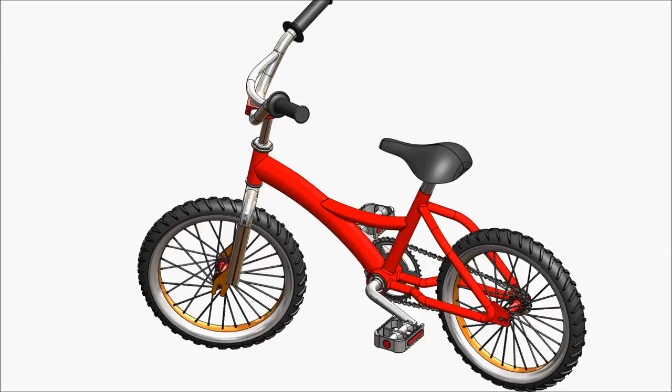Today we are going to design a simple bicycle, a kid bicycle, in Solidworks. I hope you like it. Let's see how to do this bicycle, and we will make a little animation at the end. So let's start.

Now let's make our first part of the bicycle, the steering. We make a steering handle. So let's start: top plane, sketch, and choose here. Let us first define a center line.

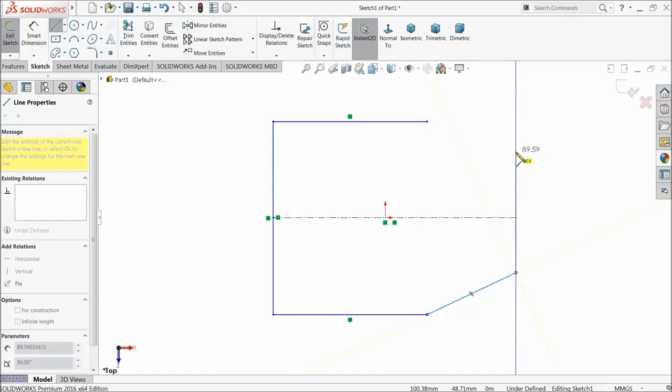Now choose and play a line, connect it, exit. Now let's create some relations. Select both ends of the line and this mid line, symmetric relation. The same, what we need to do here: symmetric relation. Let's select these 2 points and the center line, symmetric relation.

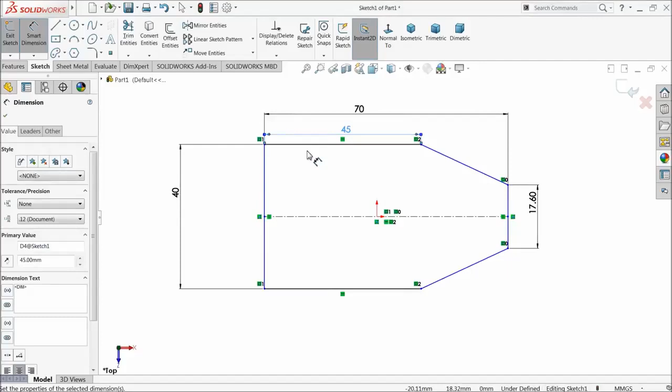That's it. Now let's define it: 70 millimeter, 40 millimeter, 17.6 millimeter, 45 millimeter, and let's make the distance from the origin point 35 millimeter.

Choose here fillet, 6 millimeter, and select these two ends. Now again change it to 26 millimeter. Select these two corners.

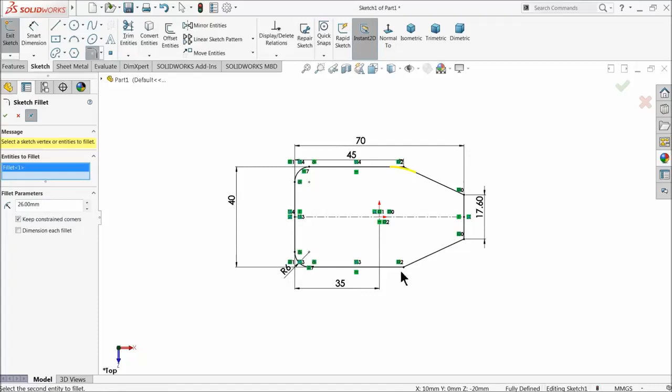I think we just undo one process. Keep only 26 millimeter.

Now the last one is 8 millimeter. Now select extruded boss, 20 millimeter, and let's keep mid plane condition.

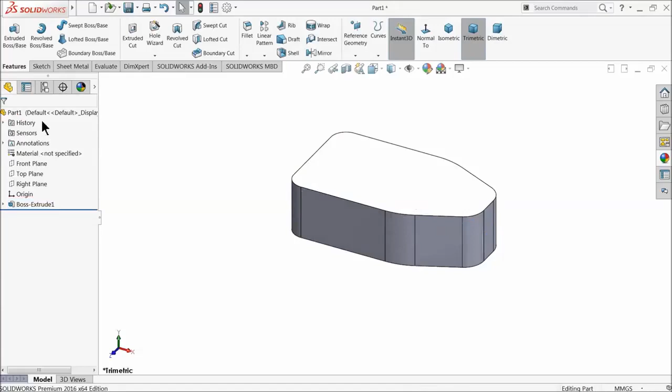Let's define some color to this body. Select only the extruded boss and let's choose some orange color.

Now select this body, sketch, select line, convert it into arc. Actually we want to make a half circle here. It's not going to exit. We don't want to make half actually.

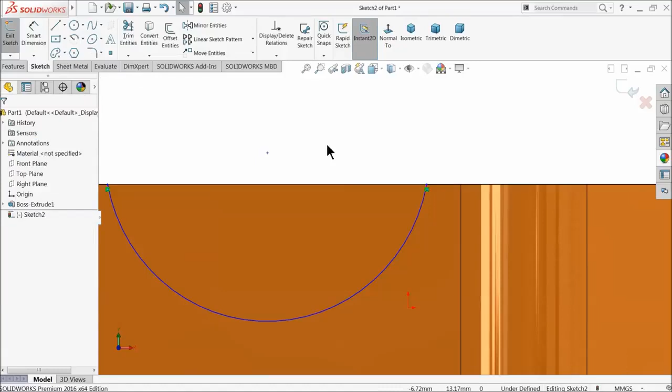Center point arc. Now start from here, connect this point to, okay, exit. Now here select these 2 points, go inside. That's it. Now let's define this point.

4.75 millimeter, and keep radius 12.5 millimeter. 11.1 millimeter. Okay, now here choose offset.

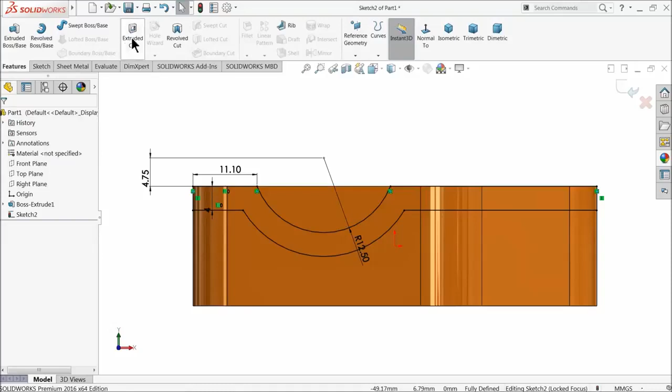Keep 4 millimeter and select this line. Choose here line and connect it. Exit. Now this portion we want to keep, the other all we need to extrude cut, select extrude cut. Here select flip side to cut, that means both sides will cut through all. Okay, that's it.

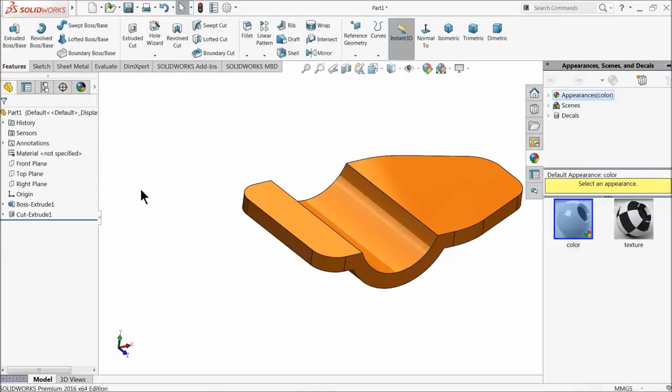Now let's start to make the handle rod. Select backside, sketch normal. Draw a circle and let's keep the diameter 20 millimeter, and the distance from the outer edge 19.18 millimeter. Select the circle center and origin, horizontal.

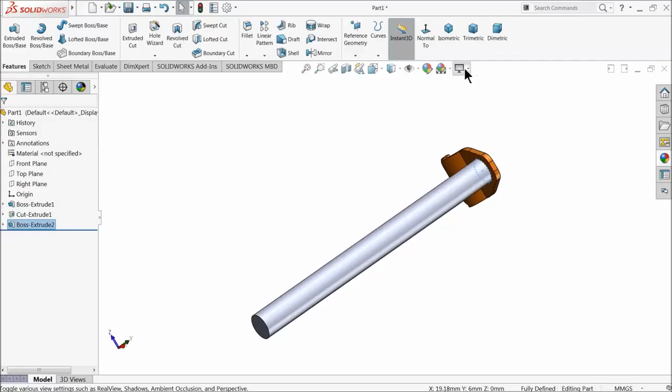Now let's extrude it, and extrude up to 225 millimeter. This rod we will assign later.

Now choose here the right plane and create one plane, 20 millimeter, just center to this circle.

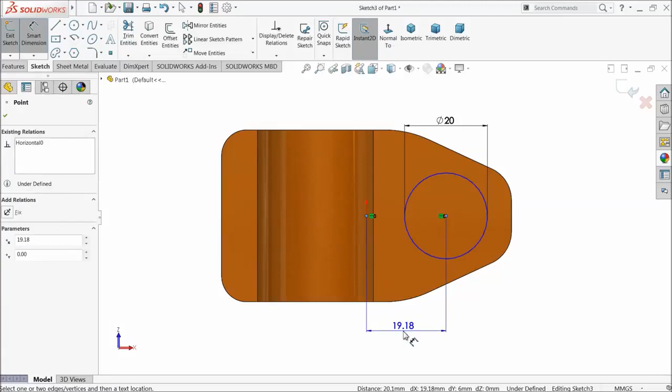Now edit this rod, sketch normal, delete this relation, and make it 20 millimeter, exit. That's it.

Now the plane in the main mid portion. Let's do one thing: select this plane, sketch normal. Now here we will extend this handle furthermore. Choose line.

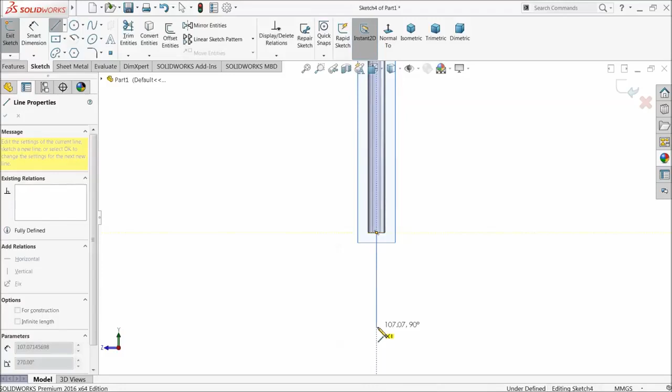Let's draw one center line, make sure it's a center line. Delete this coincident relation, make it a little up. Choose here line, convert it into arc, and take it down, exit.

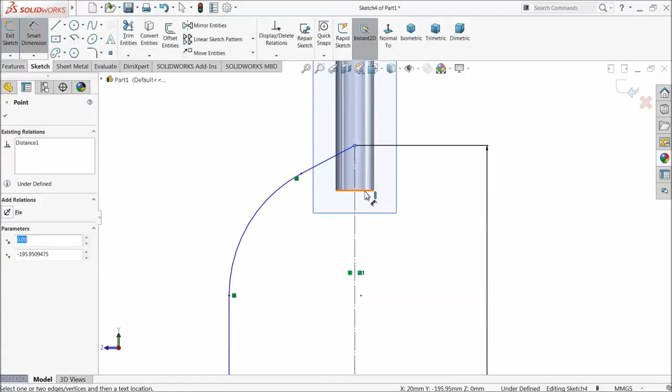Now let's define this: 230 millimeter, 30 millimeter, 68 millimeter the radius, and let's make the gap 57.5 millimeter. Exit.

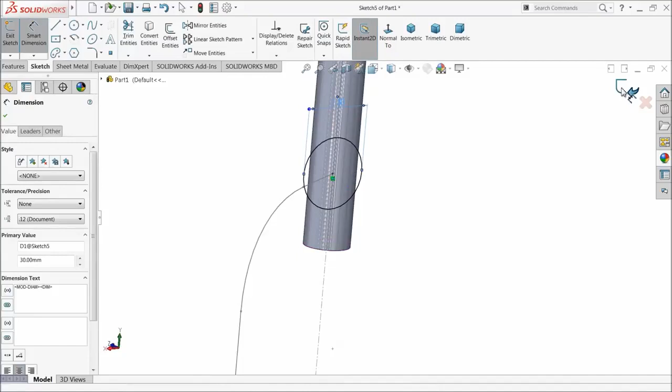Now hide this plane. Now here choose front plane, sketch circle, and let's draw a circle with this point. Keep diameter 30 millimeter. Exit. Now go to feature and select Sweep Boss Base.

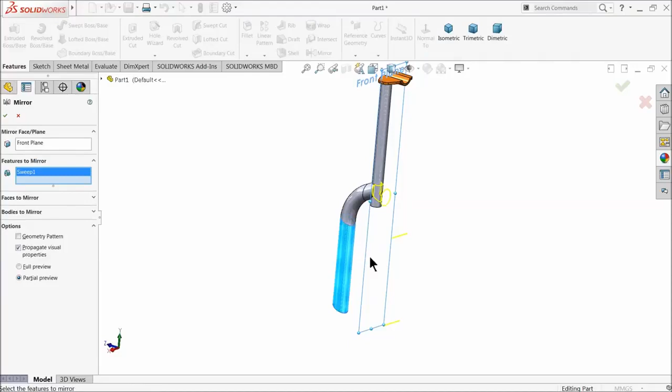Select this profile. Now you can see it here. Now let's choose front plane, mirror, and select this body, this extruded body, and just mirror it. That's it.

Now select this face, sketch circle, center point, and draw a circle with 30 millimeter diameter, and extrude it 150 millimeter but reverse direction. Okay, that's it.

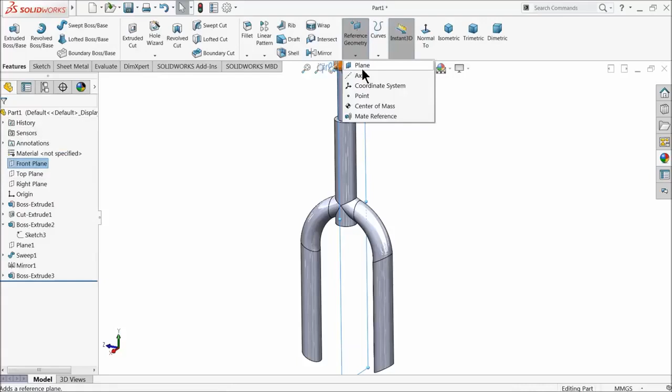Let's try to create one plane, front plane, and make it 50 millimeter.

Now select this front plane to sketch, take the position, and here we will make our geometry. So first make a center line, vertical, and just drag it, start point and put in center point. Select start point and this line, make sure coincident. Okay, now let's select here line and start our geometry.

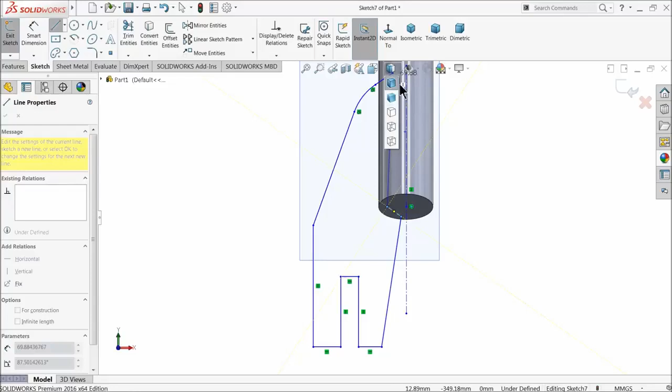Select up to here and this line and connect with this, exit. Okay, up to here.

Hide this plane. Now let's try vertical line, 11 mm, exit start point and put this star here at the center.

Or do one thing, delete this line. We need to again put one star here. That's it. Line.

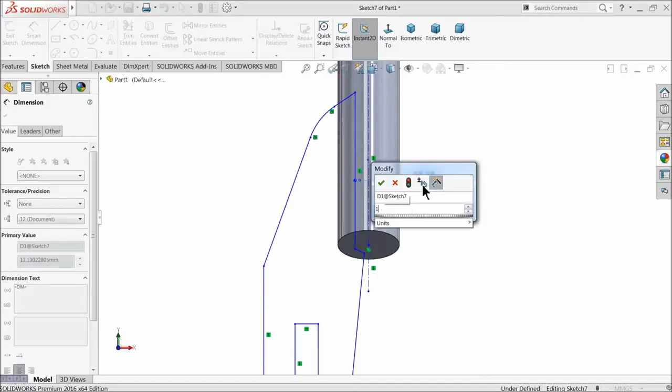Now let's define this gap, 11 mm. We are missing with these lines, so just delete this again and draw a center line from top. Here we will get the midpoint. Okay.

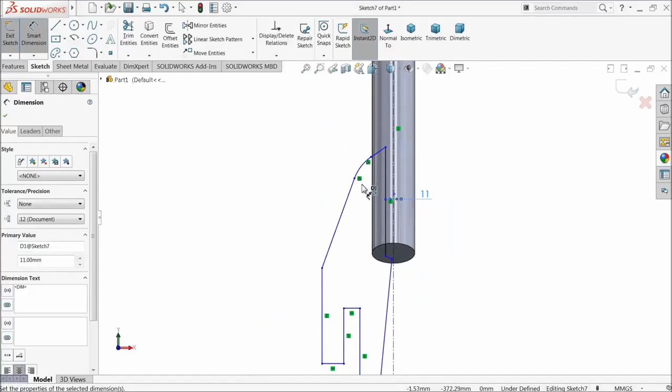Exit. That's it. Now let's move, 11 mm. Okay, make collinear relation.

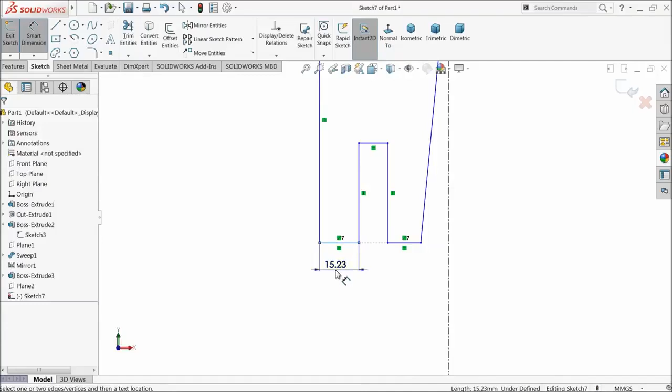Ten by 10 mm, and here also keep 10 mm. Select circle, trim entity, trim to closest. Okay.

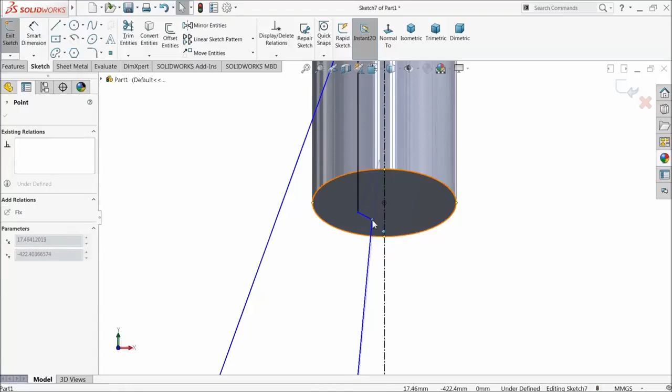38 mm, 25 mm. Okay, let's define some angle. 115 degree, 3 millimeter. Okay.

Start point put in center. Now define this distance from start point to bottom line, 38.75. Oh, it's missing actually.

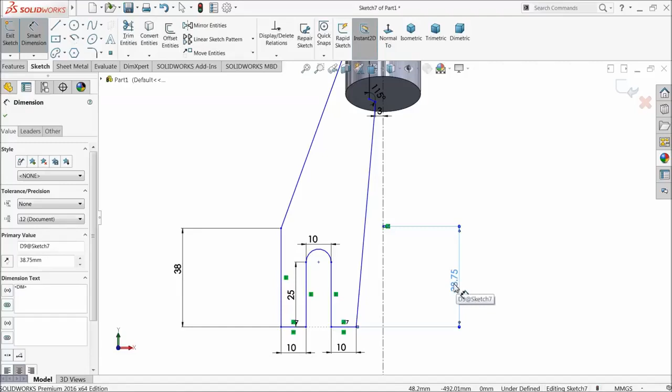Let's try to create one. That's it. Midline. That's it. Now fix distance from here to bottom line, 38.75 millimeter. That's it.

Radius keep 10 millimeter. Now overall distance check, 90 millimeter only. Fillet, 30 millimeter.

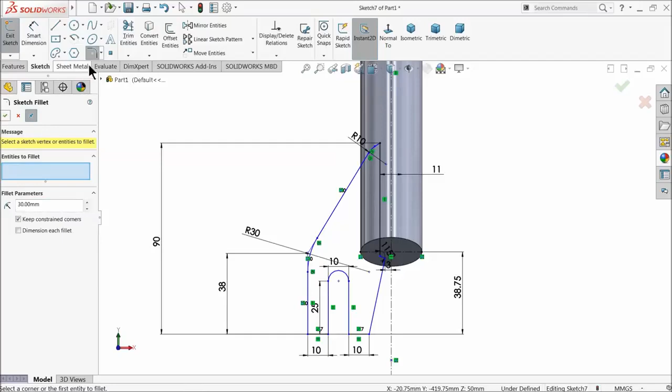Now let's choose 4 millimeter and select these corners. Okay. Now select here fully defined sketch, calculate. It's showing some error,

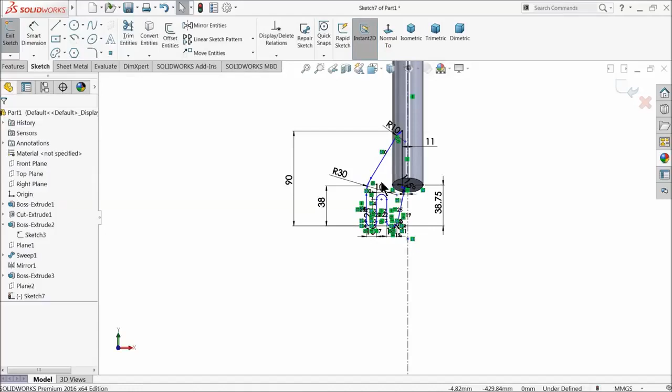but this is what we need actually. We don't need anything more, so just select extruded boss, 4 millimeter. You can see it's outside. Unmerge result. Okay.

Now just change the color to orange. Front plane and just mirror this. Okay. Select body, mirror. That's it. See, it's mirror.

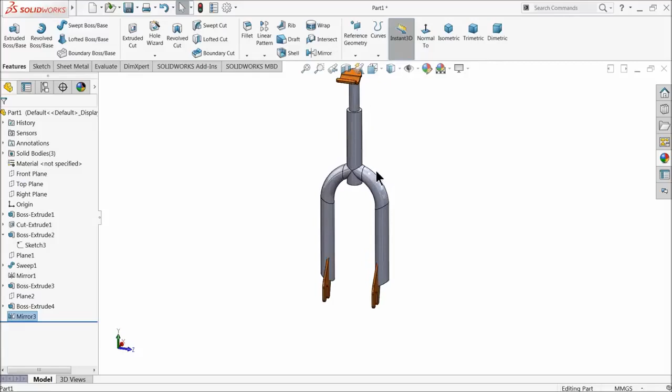Now here let's try some, we want to make some handle here. So choose front plane, sketch, and here select circle. Draw a circle and let's make diameter 25 millimeter. Okay. Now select this circle and this circle and make relation here concentric.

Okay. Now see. Now exit. Now let's create a plane because we want to use this as a, or directly choose. Now let's create the, actually we want to create some handle here.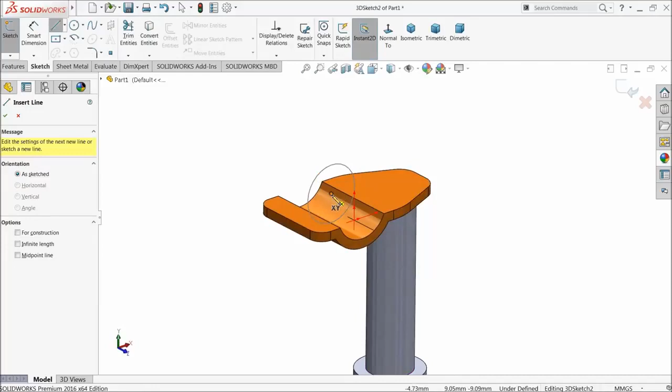Choose here line. Select this center point. Press tab key. Okay, this direction. Exit. Now let's define this, 67 millimeter. Okay.

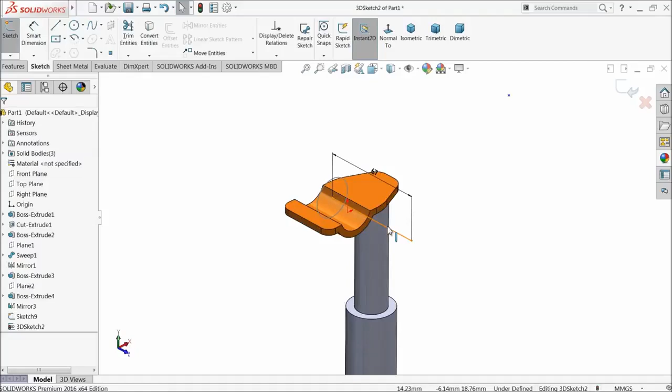Choose star point and put somewhere here. Exit. Now let's select this face and take the normal position. Okay. Now this is our star point. I hope you are easily.

Now select center point and this, press tab key and let's define the distance 29 millimeter, 29.5 millimeter. Now again select this point and this point. Press tab key, again tab key and define vertical distance, 197.8 millimeter. That's it.

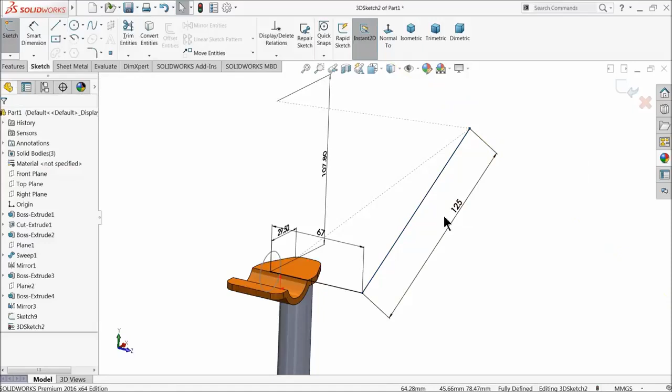Now just take little position and define the distance from here to this point, 125 millimeter. Okay, choose line and connect this point to this point. Exit. That's it. Now again choose star point and put somewhere above. Exit.

Select this point face, sketch this star point, drag it here somewhere. Tab key and define gap, 103.5 millimeter. Then again tab and define vertical distance, 172 millimeter. Let's rotate it.

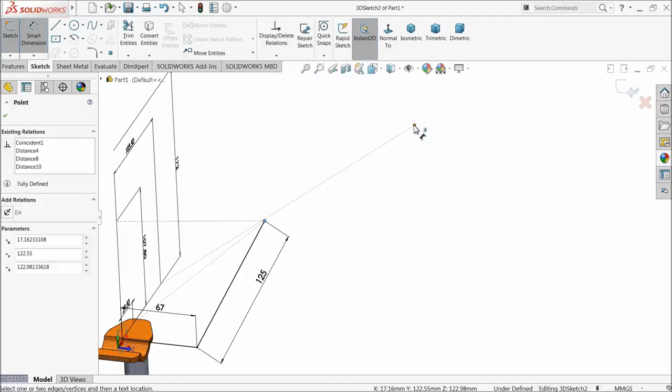Now define the distance end of the first star point to second star point, 156.8 millimeter. Okay, choose line and connect it from this star point, exit. Now see, this geometry is fully defined.

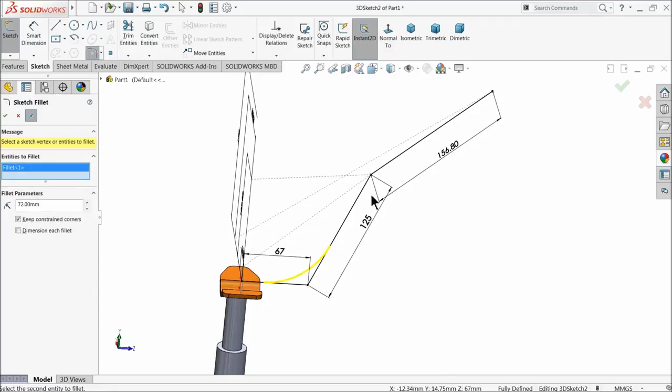So choose fillet, 72 millimeter, select these two corners, press OK, or select these two lines, OK, exit. Now exit from the sketch.

Now go to feature and select here swept boss base. See, profile selected, path selected, just select profile. See, OK.

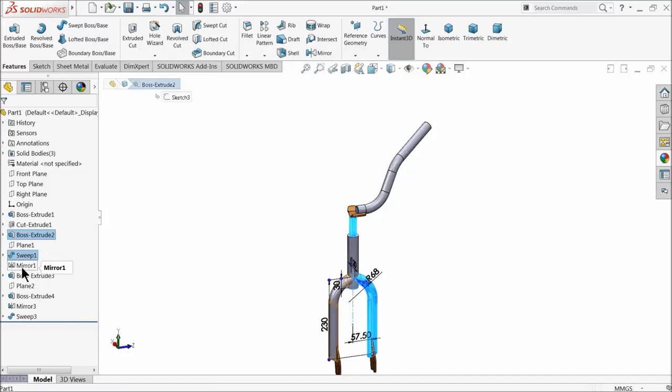Now here let's assign some metal color, 1, 2, 3, okay. These bodies we go to appearance, steel, and polished stainless steel.

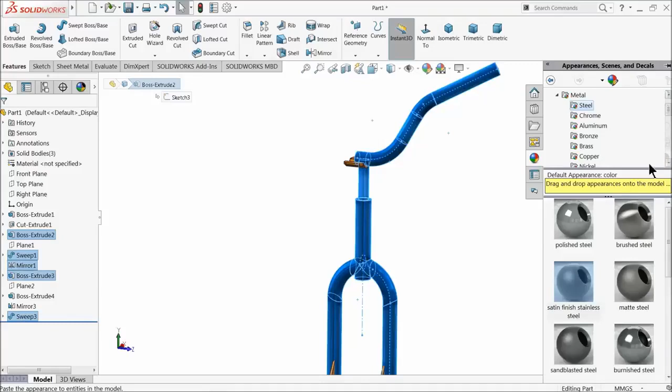Check it again. 1, 2, 3, 4, and the last one, chrome plating. That's it. It looks real steel.

Now choose front plane, mirror, select this body. Okay, now see, it's mirror.

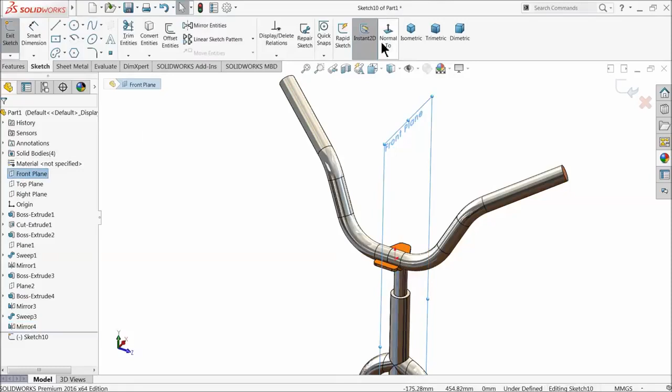Again choose front plane, sketch, normal. Now here we want to connect, 19mm, 63mm, 25mm. Okay,

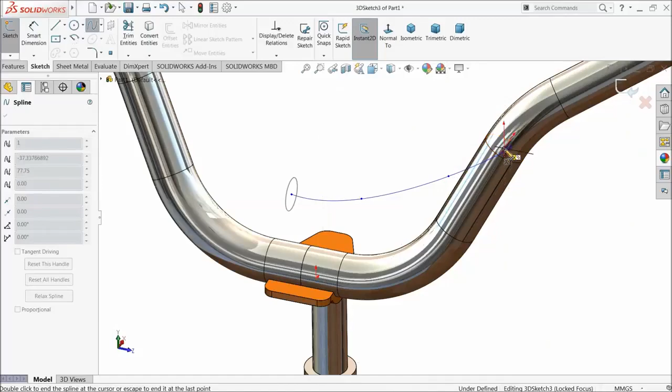now simply exit. Now choose here 3D sketch, spline, and select this point 2, 3 and center point of this circle, exit. Take, okay, do one thing, just delete it.

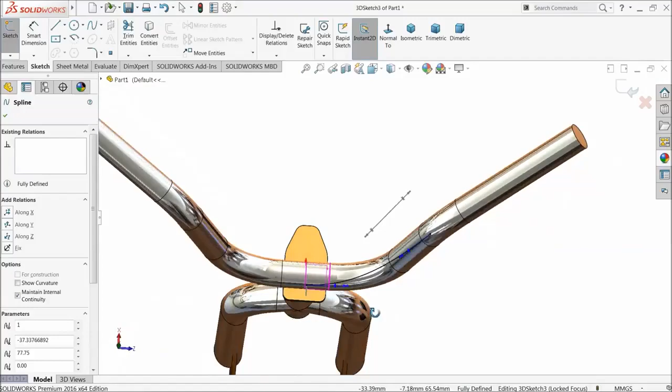Select spline, directly connect from this point to center point, connect it, exit. Now just drag it, that's it, that's fine, it looks better. Exit. Sweep to boss base. You can see the preview.

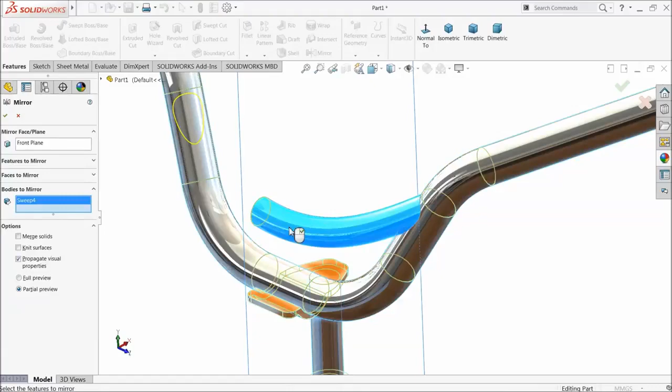Okay, now just try to choose front plane, mirror, and select this body, mirror. That's it.

It's not look perfect, so go to 3D sketch, select this circle and this spline, take little upward, or select this arrow along x-axis. I think delete all. Y-axis also we don't need. Try z-axis. Okay, the z-axis is perfect. Exit. Now see, it looks perfect shape.

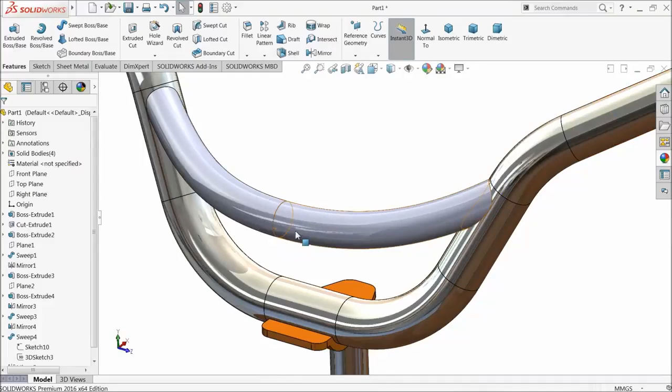Select these two bodies, chrome plate. That's it.

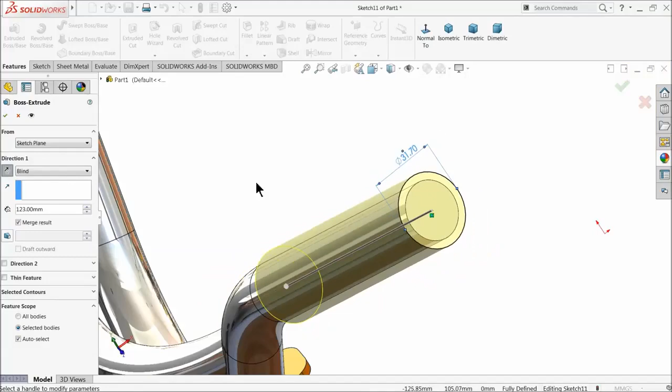Now here we will make rubber gloves or for handle. Select this face, sketch, circle, and make circle 31.7 millimeter and extrude. Extrude up to 123 millimeter reverse direction. Okay.

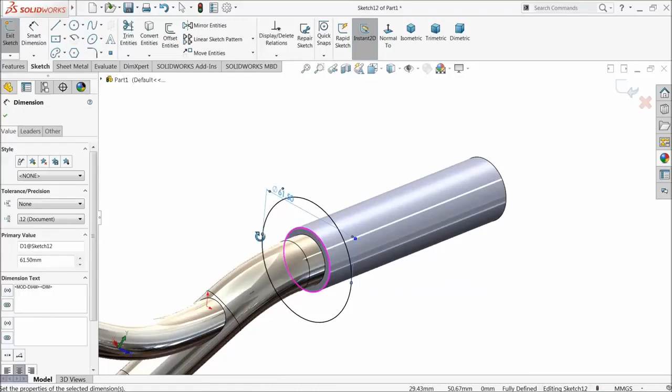Sketch circle. Let's create this one. 40 millimeter extrude, 4 millimeter reverse direction. Okay.

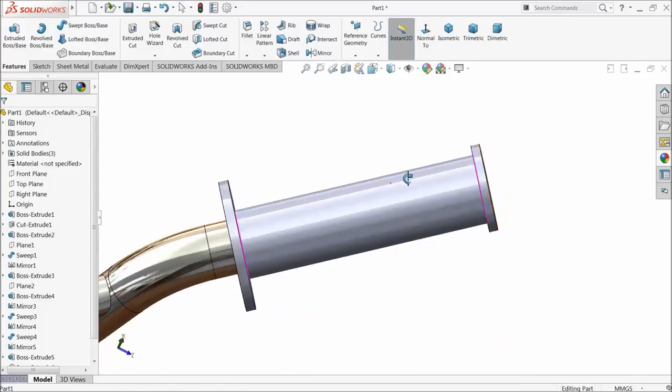Now select last three extruded bodies and define some metal color, rubber, matte rubber. Back side also.

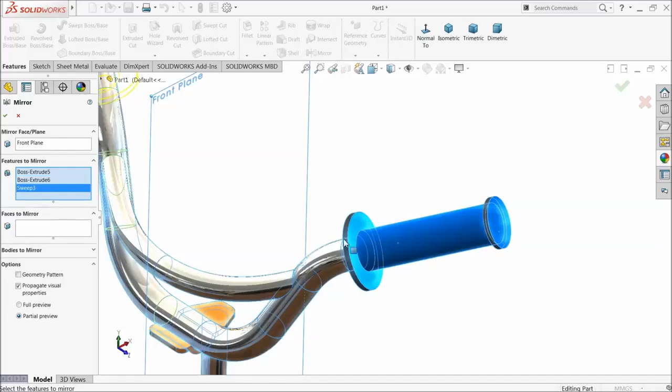Front plane, mirror, and select these three bodies. Extruded part 1, 2, 3. Okay. Now that's it. Fillet.

Edit. Clear. And select last three extruded boss 5, 6, 7. Now that's fine. Choose here fillet.

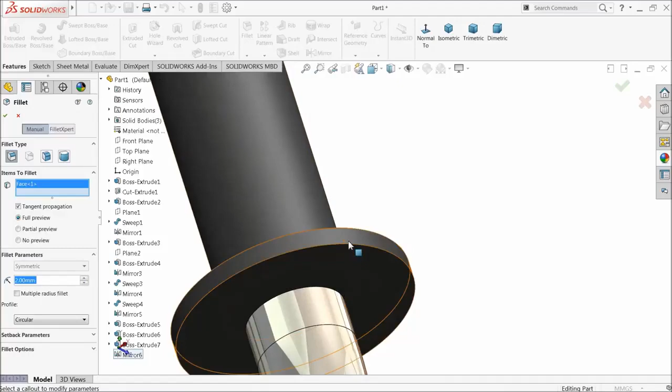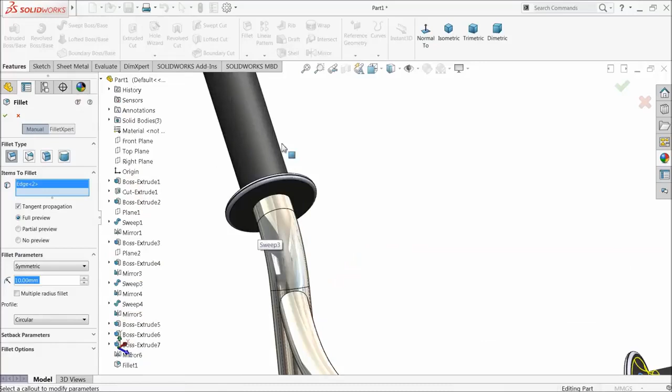Select this face, this face, this face. Okay. Again choose fillet. Keep 10 millimeter. Select the inside of rubber. Okay. Now choose both the fillets and define matte rubber. That's it.

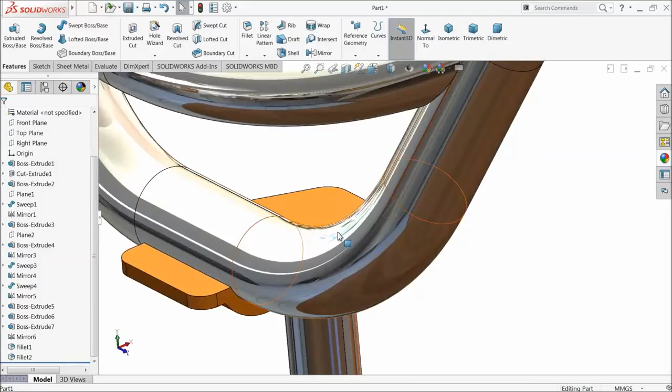Now select this face, we want to actually extrude this one little more. Sketch, convert entity. Now this is converted. Select this face, convert entities. Now select extruded boss. And select up to vertex. Let's choose

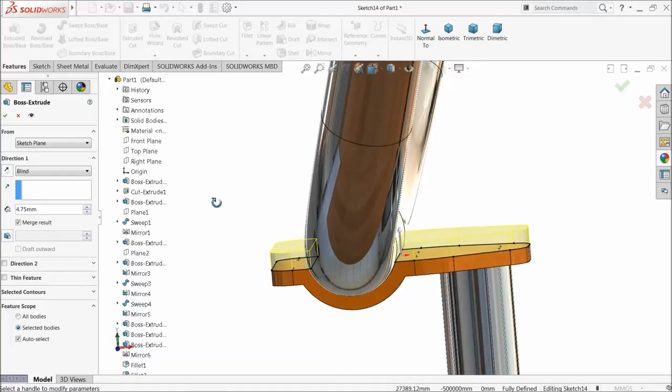We need to find a center point of any circle. Okay, let's make a blind 4.75 millimeter. Okay.

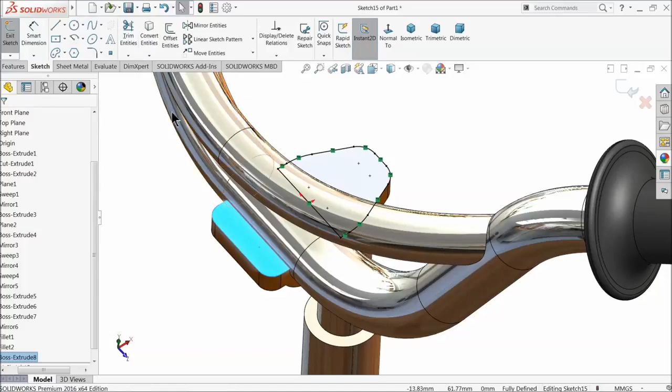Now again choose the same face, sketch, convert entity, this face also. Actually cancel it, we don't want to convert it actually.

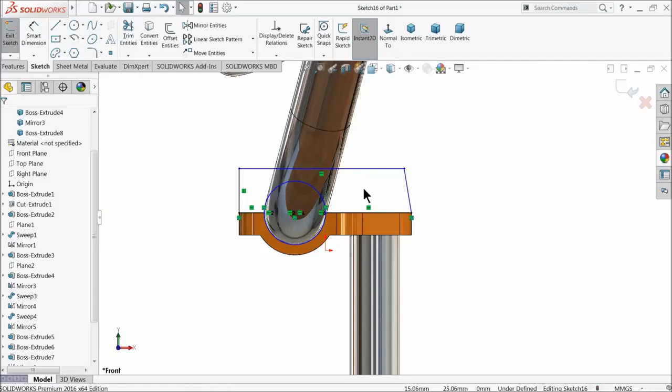Front plane, sketch, normal. Select here circle, and this is the midpoint circle. Choose here line up to end point. Exit. Make it vertical.

15 millimeter. Trim entity and trim this half circle. Okay. Extruded boss. Now this faces we want to extrude. Mid plane. 40. Okay.

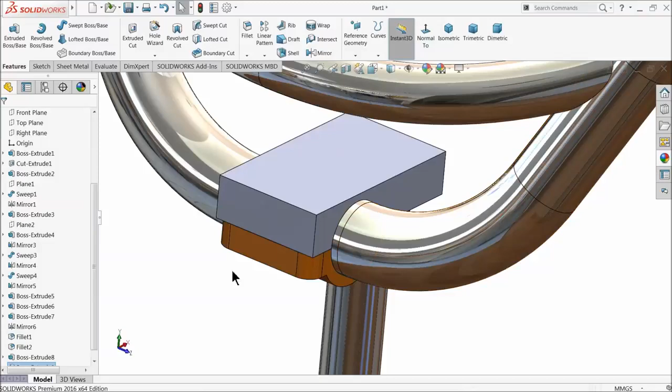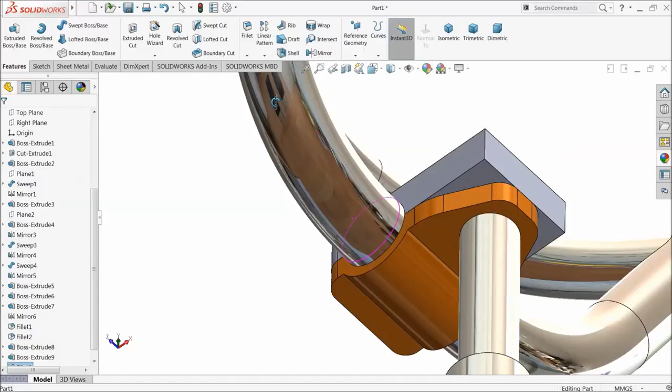Now select this face, sketch, convert entity. Now select this face also, convert entity. Now this face is converted. Extruded cut. Select these two faces. That's it. This is enough 40 millimeter. Okay. That's it.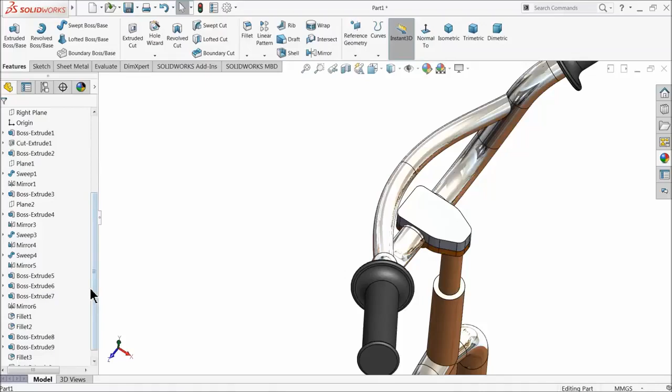Now select this body and define a color. Orange, same color we will put it. Okay. Now that's it.

Now select this face, sketch, choose here polygon, just find out the center point and draw one polygon, and let's keep the distance 40 millimeter and extrude 5 millimeter, make it reverse. Okay.

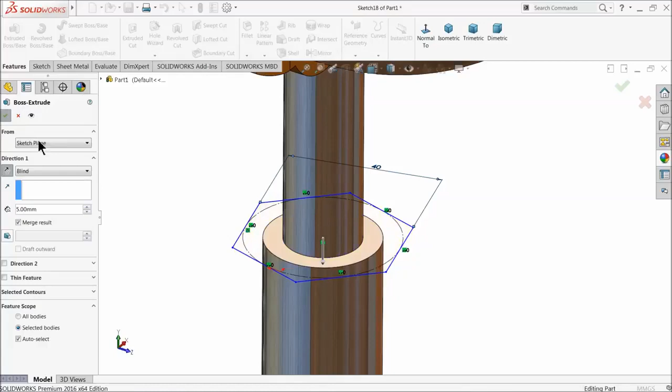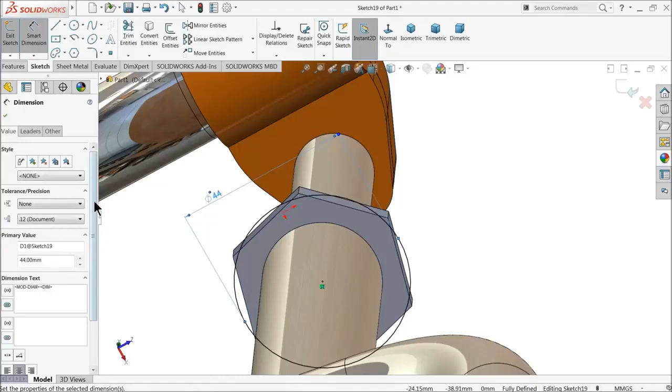Again select the back surface, sketch, circle, and find out the center point and draw a circle with 44 millimeter dia. Make little bigger. That it should cover this 40 millimeter, extrude 5 millimeter. Okay.

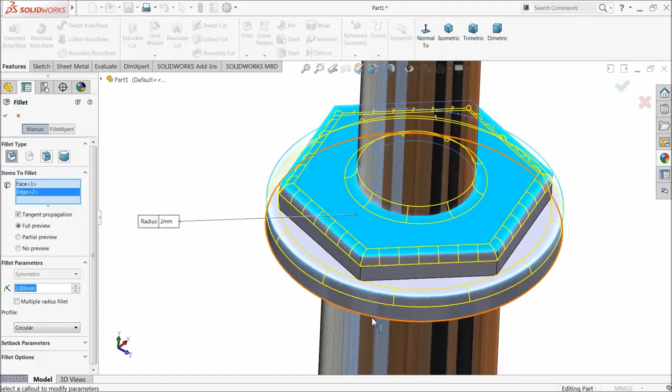That's it. Fillet 2 millimeter. Select this face and this. Actually, we need to select only one face. Okay. So now bottom all the body should be chrome plate.

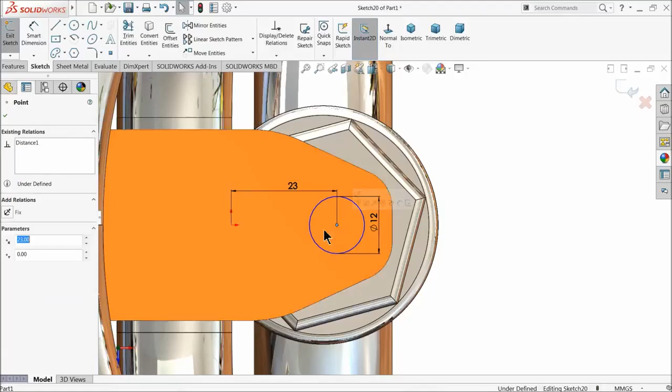Now here we want to fix one bolt. Sketch circle. Twelve, 23 millimeter. Okay. Select here extruded cut. 20 millimeter.

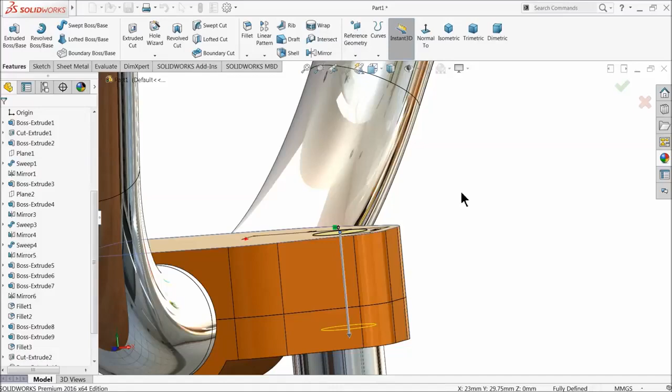Sketch. Convert entity. Now this whole line is converted. Sketch. Exit.

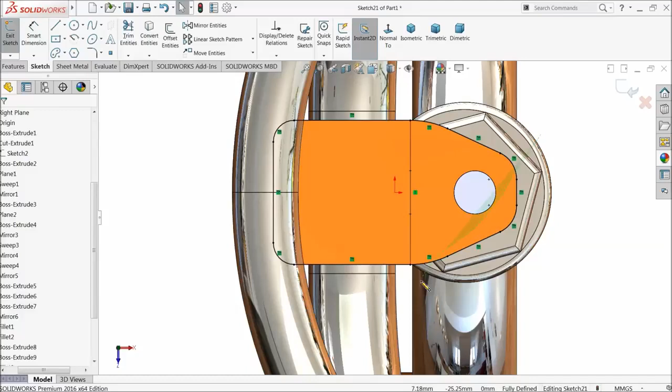Now delete rest of all box. Fillet 6 millimeter. Okay, no need here. Fillet.

Offset. Reverse. Undo. Reverse. Okay.

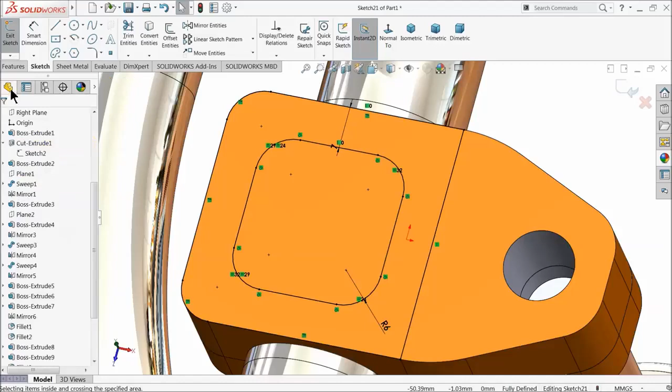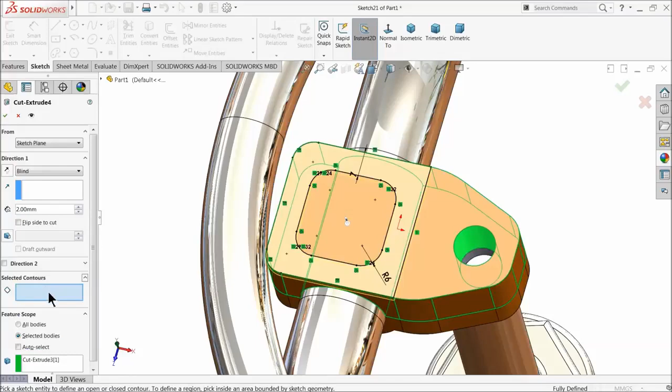Cut 2 millimeter. We don't want to cut this one, so just edit and here select this face we want to cut. Okay, that's it.

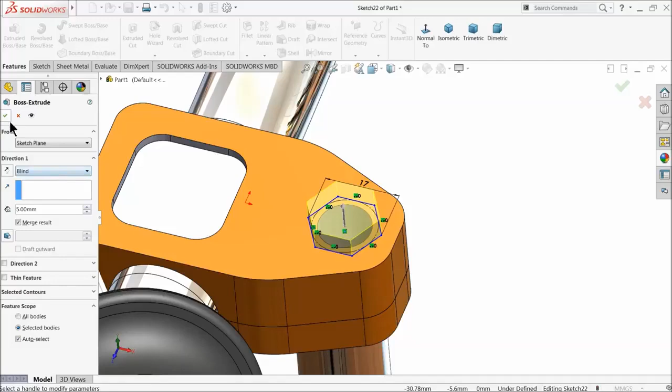Now here we will fix one bolt. Sketch. 17 millimeter and extrude. 5 millimeter. Fillet 0.5. Okay.

Steel, satin finish stainless steel. So this is our handle, our bicycle handle. So let's save this.

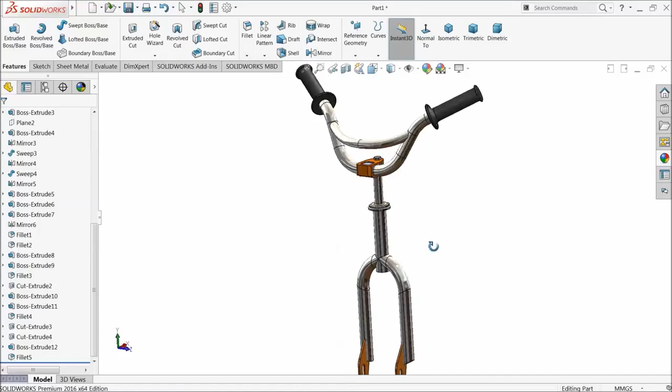Desktop. Create one folder. Bicycle. Make it part 1, steering. Let's now make our next part, bicycle frame.